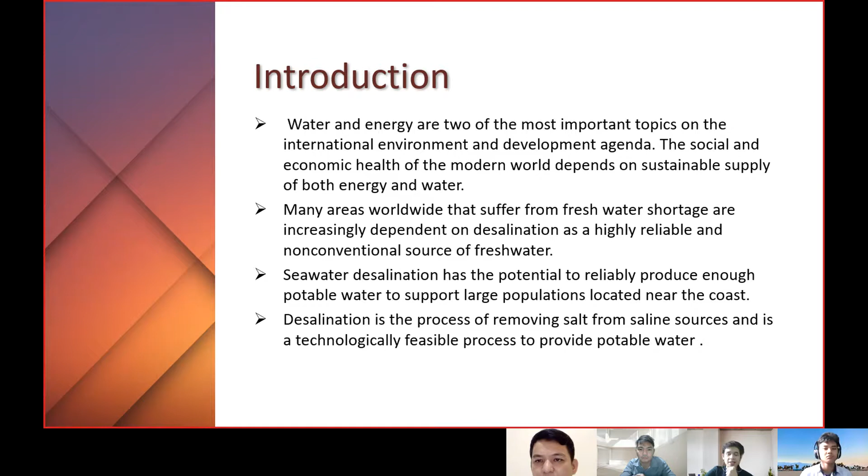Development in desalination technologies are specifically aimed at reducing energy consumption and cost. However, most of the current desalination technologies consume large amounts of energy. For this purpose, a new water desalination system has been developed through the integration of dehumidification.

All technologies are good for the desalination of salt water. However, these are often not suitable for remote areas or domestic use due to the large infrastructure associated with them. Therefore, small capacity desalination units are an effective solution for the provision of fresh water in remote areas and home use.

In comparison with other desalination methods, the humidification method has a number of advantages such as simple design, flexibility, low maintenance, capital cost, utilization of low-grade energy, and applicability in decentralized areas for supplying freshwater.

As mechanical engineers, the proposed process is to design water desalination using the humidification dehumidification process to find its full potential and significance towards small communities, given the limited number of instructional materials for development. This study impacts as an additional learning platform for students in mechanical engineering.

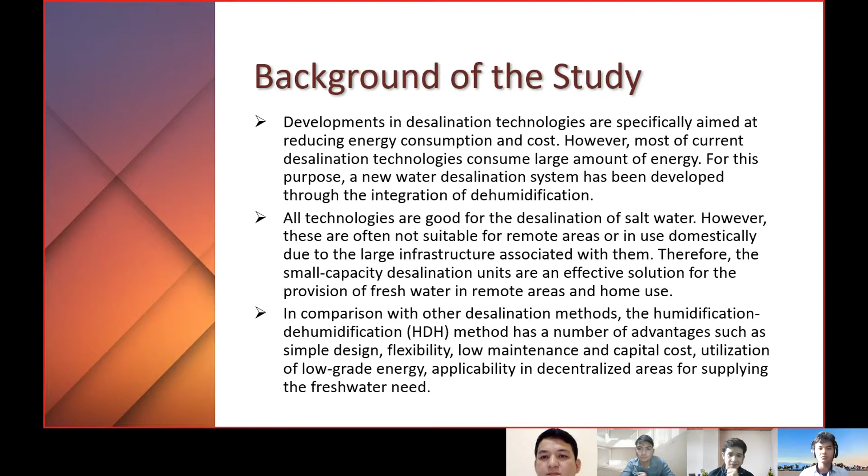The main objective of the study is to design and fabricate a water desalination system using the humidification dehumidification process. It is our main objective.

Specifically, the proponents aim to prove that it can produce fresh water with less energy consumption, to determine the latent heat recovered during vapor condensation, to determine the amount of fresh water produced in different feedwater temperature conditions, to be used as material for instructional purposes of ME students, and to select equipment or parts suitable for humidifying, dehumidifying, and heating of seawater.

Scope and delimitations: the scope of the study is on design and installation of a seawater desalination system using the humidification dehumidification process. This design is suitable for remote as well as small population regions.

It will be more focused on the process inside the system and the effect of different temperatures of seawater when it comes to freshwater output. Furthermore, the collection of feedwater for prototype testing will come from Baseco Beach.

This research, however, is subject to several limitations. The desalination system is only designed to treat seawater for household and agricultural use. Brine concentrate disposal and processing is not part of the study.

The process of solar water heating is also not part of the study. Fresh water produced is not recommended for intake unless output water testing is conducted. The feedwater temperature from the solar collector will range only from 80 to 90 degrees Celsius.

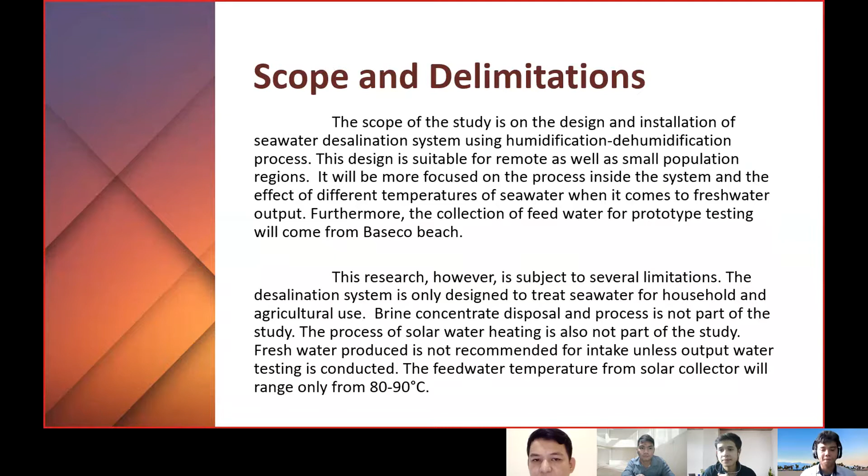Next is Van Joseph. Yes, for our Chapter 2, review of related literature and studies, I am going to discuss it based on our research.

So here is the information we gathered in our related foreign literature. As mentioned in the introduction, the most important need in our community is water. There is a clear need to help create a sustainable solution to the rural water problem in order to solve the global water crisis.

The minimum water needs for drinking and cooking for each of those communities is between 10 and 100 cubic meters of pure water per day, at a consumption rate of 10 liters per person per day. And in our topic proposal, the desalination process, here is the principle.

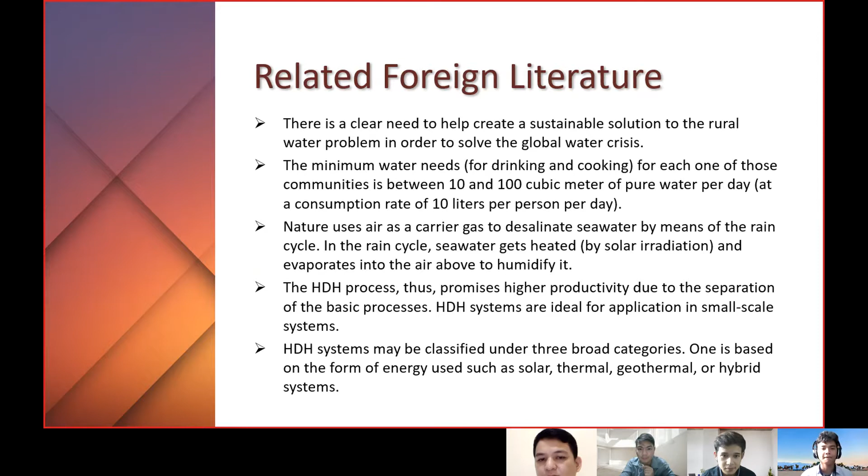Another information gathered for related foreign study - here are the advantages of HDH. Humidification and dehumidification can be advantageous in decentralized applications, meaning in places that cannot be reached by Maynilad or any other big water production facility.

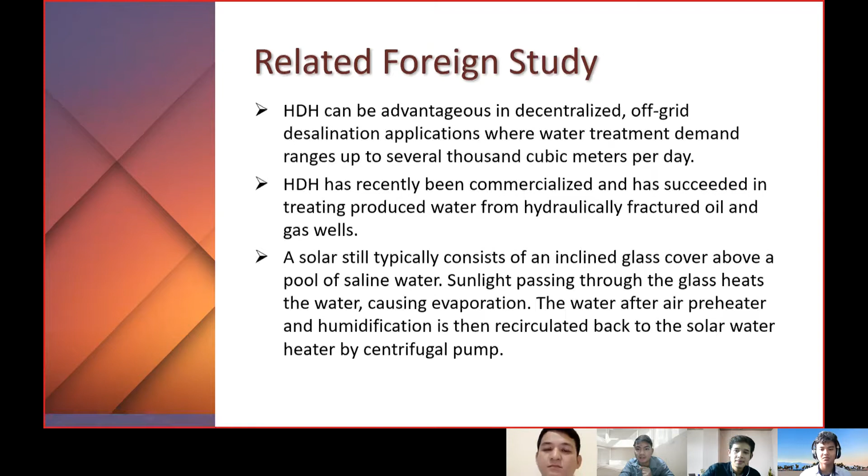Off-grid desalination applications where water treatment demand ranges up to several thousand cubic meters per day. HDH has recently been commercialized and has succeeded in treating produced water from hydraulically fractured oil and gas wells.

Before being known as HDH, it was also known as a solar still. A solar still typically consists of an inclined glass covering above a pool of saline water. Sunlight passing through the glass heats the water, causing evaporation. The water, after air preheating and humidification, is then recirculated back to the solar water heater by a centrifugal pump.

So this is the process of our HDH system when it comes to the solar still.

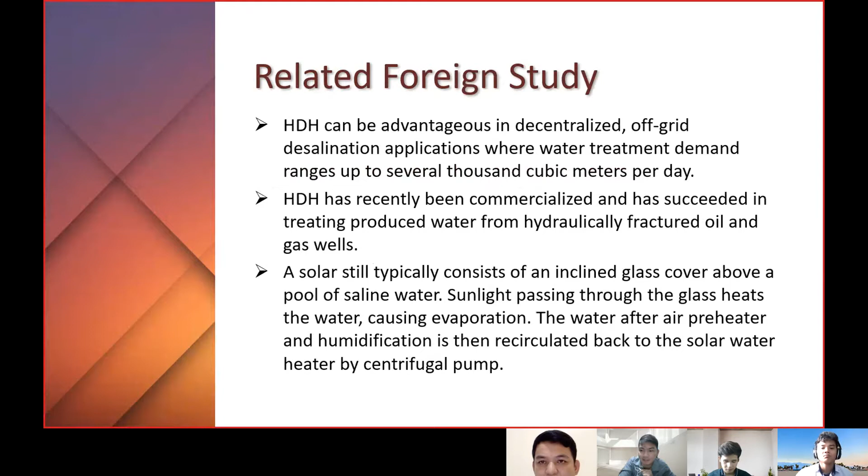This is the research information gathered based on our related local literature. Water scarcity is growing around the world, including the Philippines, and existing water resources are already under stress, especially during summertime, and this is getting worse. Locally, the onset of the El Nino phenomenon is going to make water even scarcer in Metro Manila.

One solution is the desalination process that removes salt and other dissolved contaminants in saline water. Solar power can also help solve the energy factor in desalination.

In fact, in Cebu City, the government signed a joint venture agreement to put up a 750 million peso water desalination plant that is projected to supply 22,000 cubic meters a day, although the plant can supply as much as 50,000 cubic meters a day.

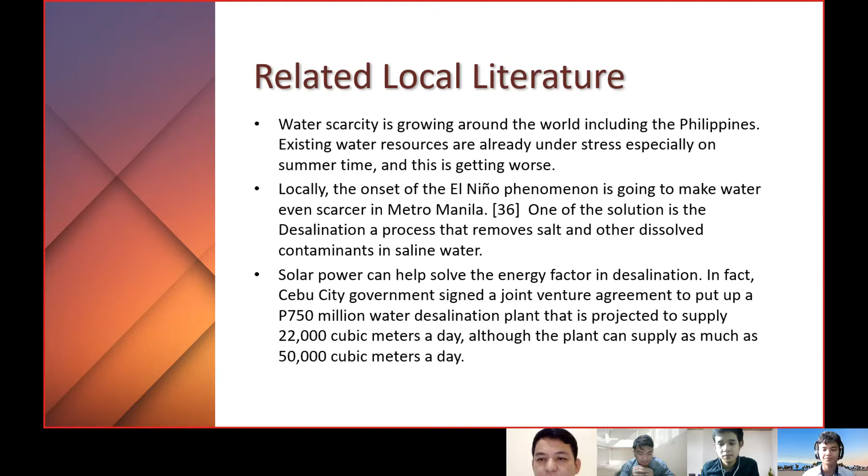Chapter 3, research methodology. We have Jason Dibilia.

This is our Gantt chart, and we are starting with choosing our subject for this project study. In our plan, we estimated just 2 weeks, but in actual it took 4 weeks because we needed to study and make sure we were all familiarized with the subject.

The next week we gathered all the information for our chosen subject. We planned it for 2 weeks, but due to the extension of our previous plan, we moved to the following 2 weeks. On the second week of our Gantt chart, we looked for an advisor for our design, and we were lucky that one of our professors accepted our proposal and gave his full support and helpful advice for this project.

The following week, which is the 7th and 8th week, we started doing our Chapter 1: the introduction, searching and analyzing the background of studies for the chosen subject, and then our objectives, both general and specific. After 2 weeks of compilation, we also did Chapter 2 and shared it with our advisor, who shared his knowledge and laid down comments on the topics of the study.

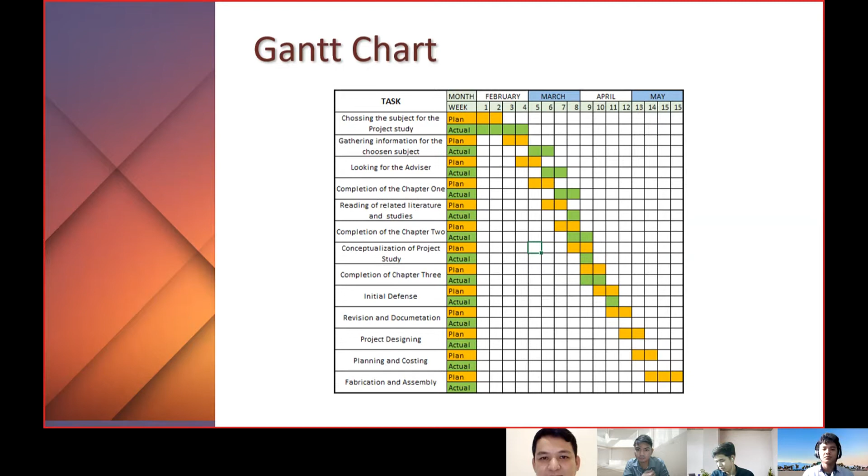This is our research paradigm, which we categorized into three sections: input, process, and output.

In the input, we start with the knowledge requirements. We came up with seawater desalination, water treatment, which requires checking the output of this project or design, and fluid mechanics and machine design.

The second is hardware material requirements, which involves fabrication of the machine, selection of materials, selection of parts, and the computation of our design. Next is the software requirements, which is Microsoft Office and SolidWorks.

In Microsoft Office, we do all the paperwork and research, and in SolidWorks we do the design.

Which is in a people requirement, which is us, the researchers, and the advisor. In the process, we start by identifying the problem, which means we need to know what and where we use the machine and how it works. And then we gather all the data that we need for the design, for the project.

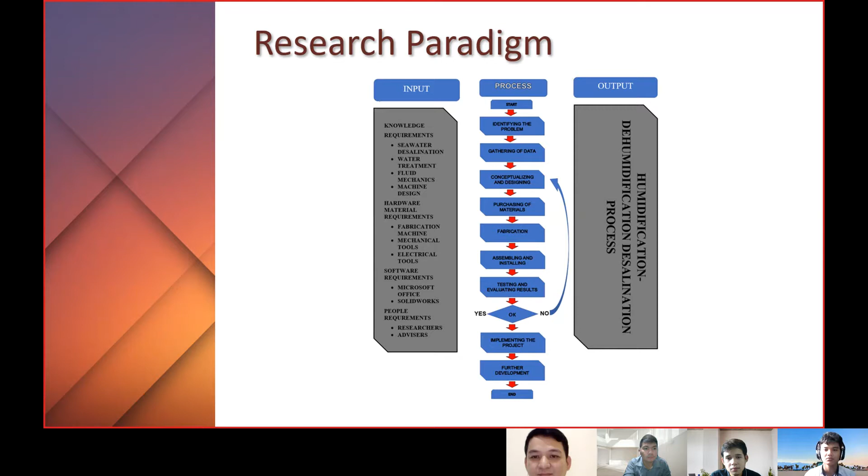Next is identifying the problem. Included in the conceptual framework, in this stage, the researchers found ways to treat saltwater using a humidification-dehumidification desalination system. Along with this, the researchers encountered problems like seawater in copper tubes, which is usually used in a condenser, but has shown drawbacks of pipe erosion, high cost of copper material, etc.

In this case, the components to be used for our HDH system, for instructional purposes for students, are: dehumidifier, solar collector or solar water heater for heating the seawater, plexiglass, aluminum tubular, and full cone nozzle sprayer, where drop size is important for considering the overall entrainment of fluid within the gas flow.

In this part of the study, it is important to identify the problem. One problem is the use of the component. We have the condenser, and in the condenser we use copper tubes. So we researched for a metal to use that will not corrode or rust. We found out that copper nickel alloy is essential to use in the condenser.

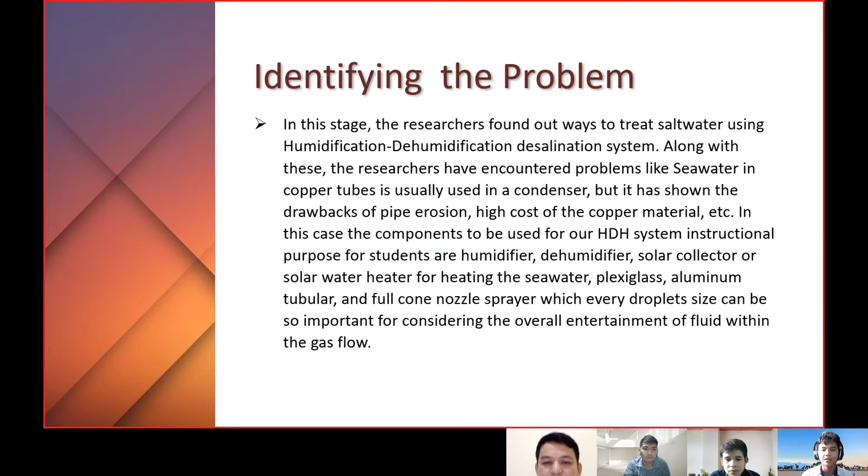The researchers adapted the idea of several studies about heat energy recovery in the dehumidifier or condenser, to determine the heat recovery using the seawater as cooling fluid in the condenser, for conceptualizing the design and selection of materials for this specific prototype. In this study, we have searched for a way to recover heat from the condenser.

So in order to recover heat in the condenser, we use seawater as the cooling fluid. We use it to cool the steam coming from the humidifier, to condense the steam and produce fresh water.

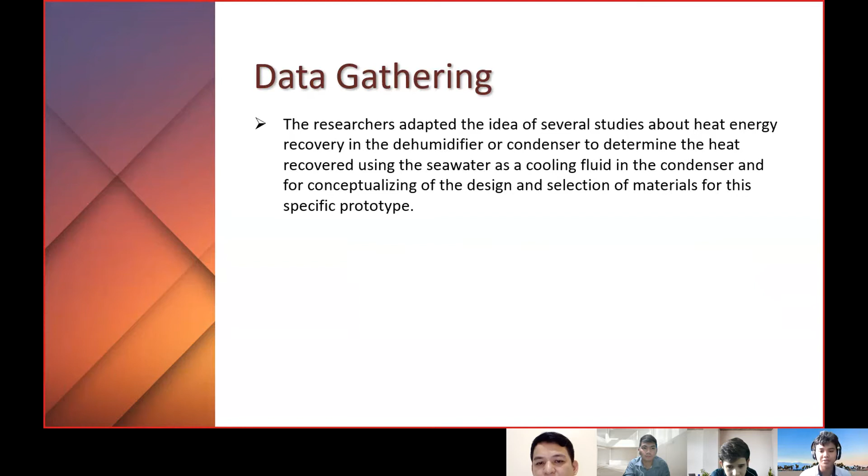Next is conceptualization and design. We have here the actual design of our prototype. We have the solar collector to heat the seawater. Then the humidifier section, we have the packed bed, which is this blue material, and then we have the dehumidifier section. We have the condenser and the demister to filter some evaporated salt water, and then we have the blower to increase the velocity of air.

Then we have two containers here. At the bottom, we have the freshwater produced container, and then the saltwater that didn't evaporate in the humidifier, which we call brine.

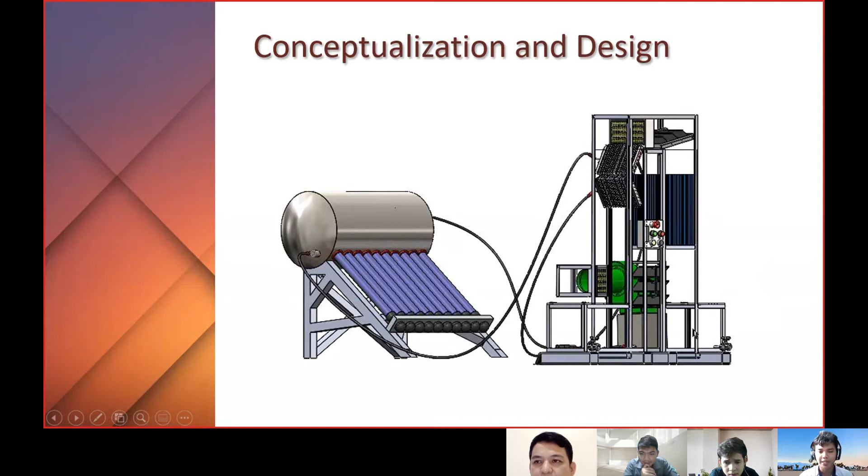Next is the component connection. This diagram will show you the process and the flow of our machine. The process will start with pumping seawater to the dehumidifier, then preheating the seawater before it goes to a solar heater.

Then fill the solar tank collector and heat up the water up to 85 degrees Celsius. Using a solenoid valve, the water will not continuously flow when the temperature is not reached.

Due to the location of our solar heater being internal in the machine, we put a pump to meet the pressure requirement that we need for the water nozzle system. And then when the temperature reaches the requirement, the solenoid valve opens.

The high temperature seawater is injected into the humidifier. We use a spray nozzle to distribute the liquid into the humidifier section. And then we estimated that 5% of the water will evaporate and 95% brine will go back into the tank and start the process again. Using a blower, the water vapor mixture is pushed into the condenser.

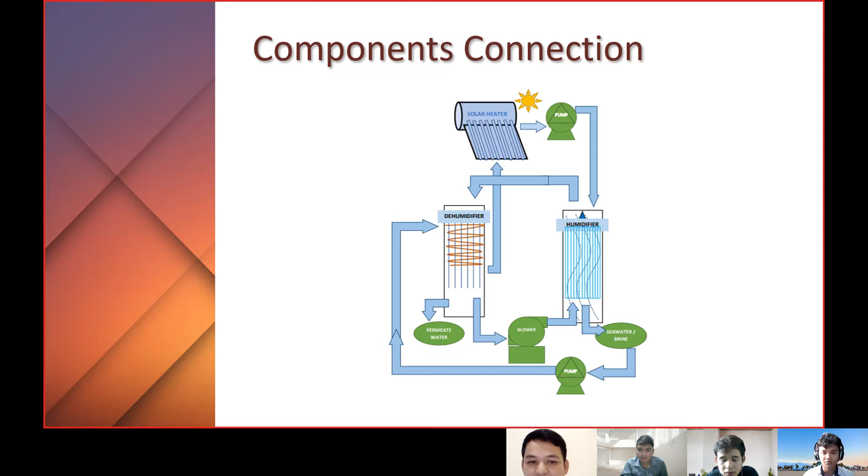Next slide. Next is the design calculation for the HDH system. This is the theoretical calculation for our design. We have to show possible humidification paths and exit states of the air. We have all these values from our calculation. First, we have to know the recovery ratio, which is 5% recovery ratio of fresh water produced.

Then the permeate concentration, based on our research in Baseco Beach, the salt concentration or permeate concentration is calculated as negative 0.2375, which is also equal to zero for the permeate concentration in desalination.

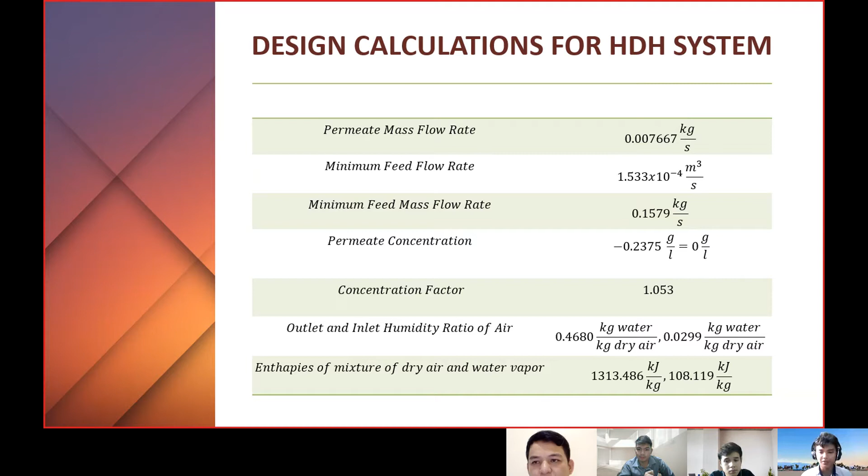Next is the component calculation of our design. We have the solar water heater. The heat added in the solar water heater is 32.07 kilowatts, and the gain output ratio is 0.8485. This is the ratio of latent heat needed to evaporate fresh water from the humidifier section.

Next is the effectiveness of the HDH system. We come up with an effectiveness of 85.72%. Next is the modified heat capacity ratio, the ratio of the enthalpy of the seawater divided by the difference enthalpy of the air.

Next is the solar water heater efficiency. We have 85.58% based on our calculation.

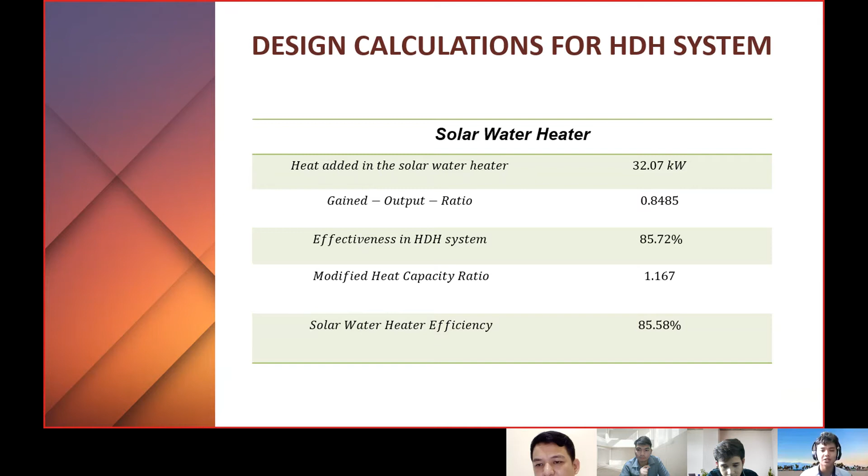Next is the calculation for the blower. We come up with power required, which is 13.30 watts, and the blower efficiency of 79.58%.

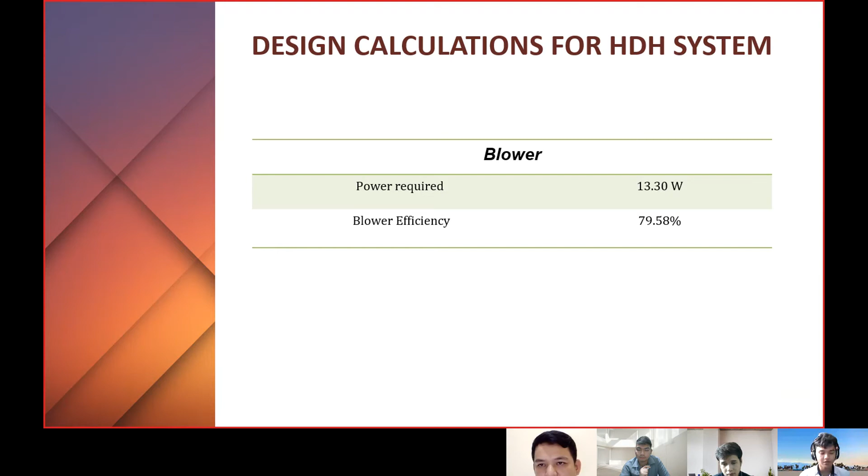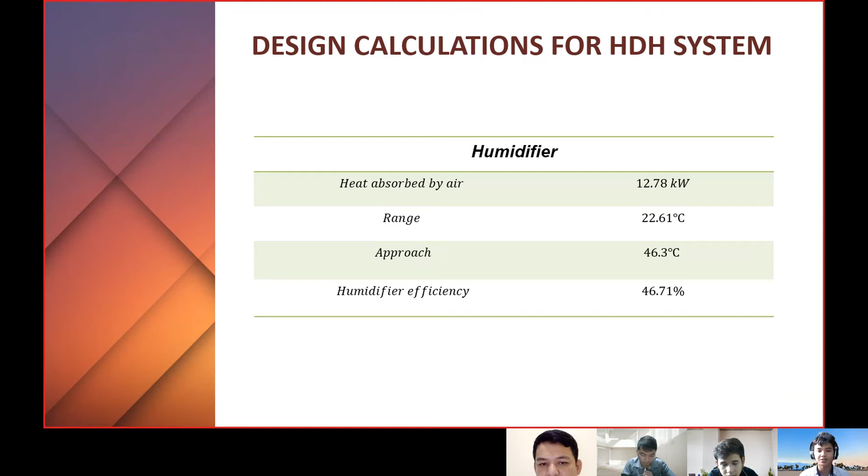Next component is the humidifier. We have heat absorbed by air, which is 12.78 kilowatts. We came up with this calculation based on a cooling tower as the basis of our calculation. We have the range, which is 22.61 degrees Celsius, approach 46.3 degrees Celsius, and the efficiency of the humidifier, which is 46.71%.

Next is the dehumidifier. We have heat rejected in the condenser, which is 15.996 kilowatts, and the heat recovered, which is included in our objective as the latent heat recovered, which is 5.65 kilowatts, and the outlet temperature of seawater, which is included in our calculation, is 39.99 degrees Celsius.

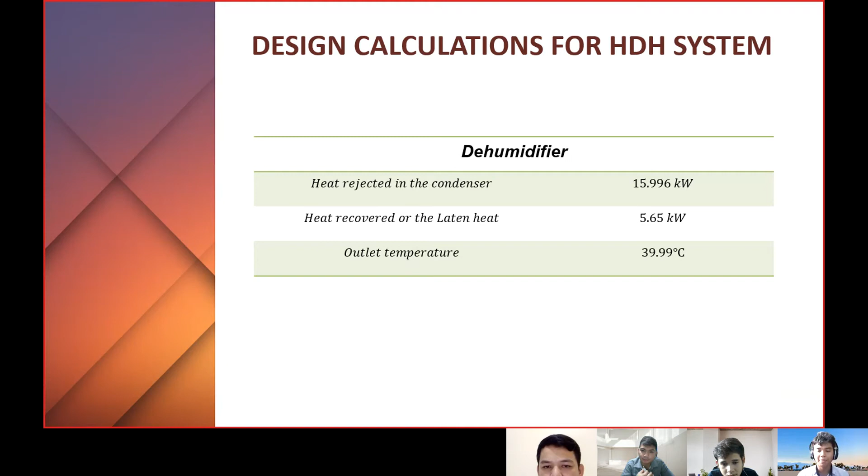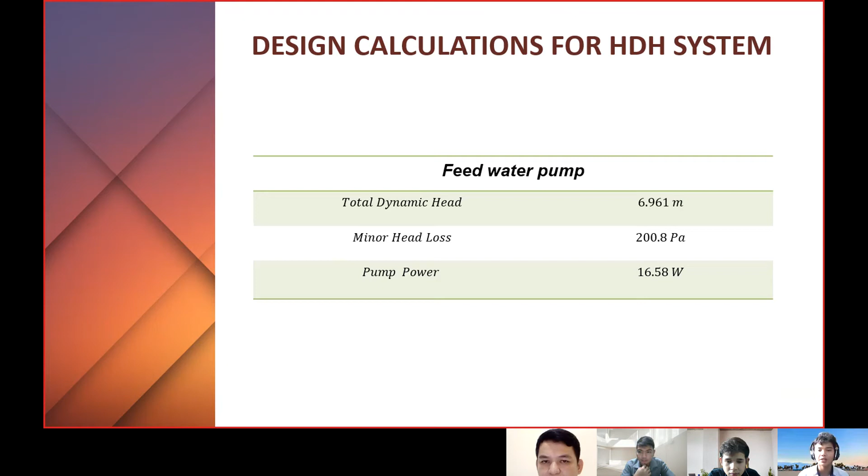Next component is the feed water pump. We have calculated the total dynamic head based on the components needed, which is the hose and other parts. We have 6.961 meters, and the minor head loss, which is divided by the density of seawater and gravity, gives us the minor head loss. The pump power is 16.58 watts, the needed pump power.

Next is the nozzle sprayer. We have the flow rate entering this nozzle, which is 2.43 gallons per minute, and the calculated drop size of seawater is 0.0001009 centimeters. Then the viscosity of seawater given in our research is 4.12 times 10 to the negative 5 cubic centimeter per second. The actual calculated diameter of the nozzle is 5.698 millimeters.

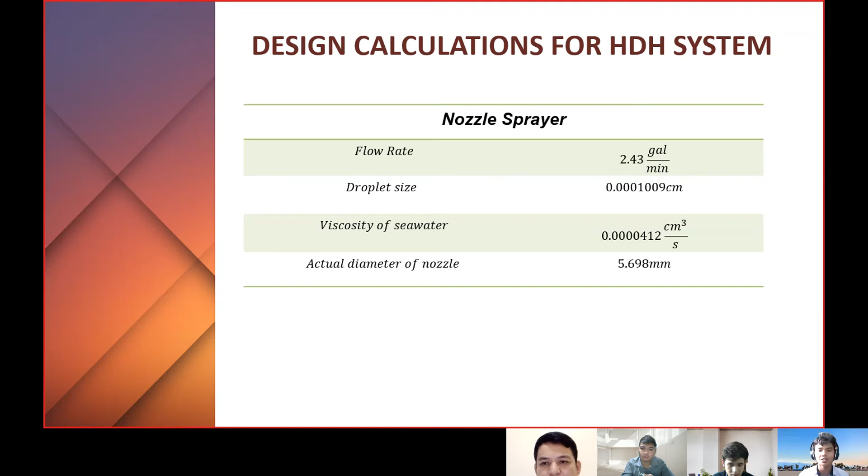Next is the estimated bill of materials.

Estimated bill of materials. Quantity 1 set evacuated tube solar collector, at a cost of 7,774.12 pesos.

Condenser, 2,500. Honeycomb, 350 pesos. Spray nozzle, 653. Seawater, 915. Centrifugal air blower, 2,480 pesos. Louver, 3,077, two pieces equivalent to total cost of 6,154.

Temperature monitor, 200. Solar hot water pump, 600. Two sets of solar collector hose at a cost of 2,500 each, equivalent to 5,000.

2 pieces of demister, total cost of 3,688. 4 pieces of aluminum angle bar, total cost of 1,600. Plexiglass, 12 pieces, 15,408. 1 piece of solenoid valve, 2,050.

Push button switch, 2 sets, cost of 300. 12 pieces of fittings, male and female, equivalent to 5,640 pesos. 2 pieces of ball valve, equivalent to 3,423 pesos. 1 piece of circuit breaker, 245. 1 piece of power supply, 425 pesos.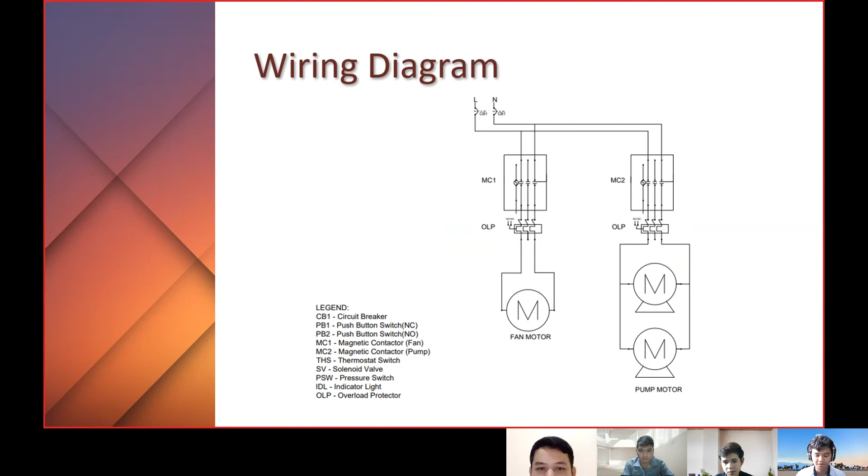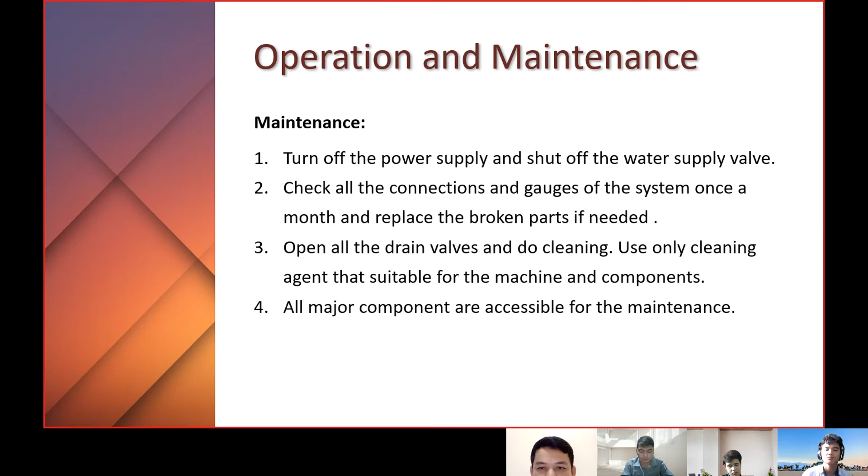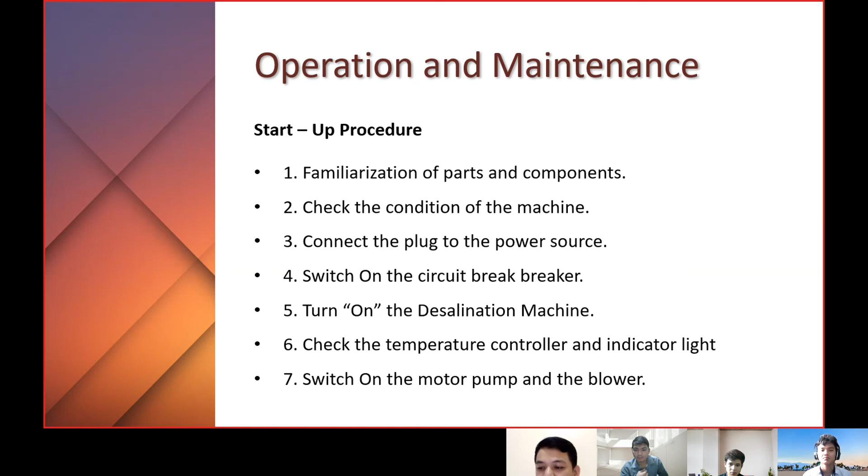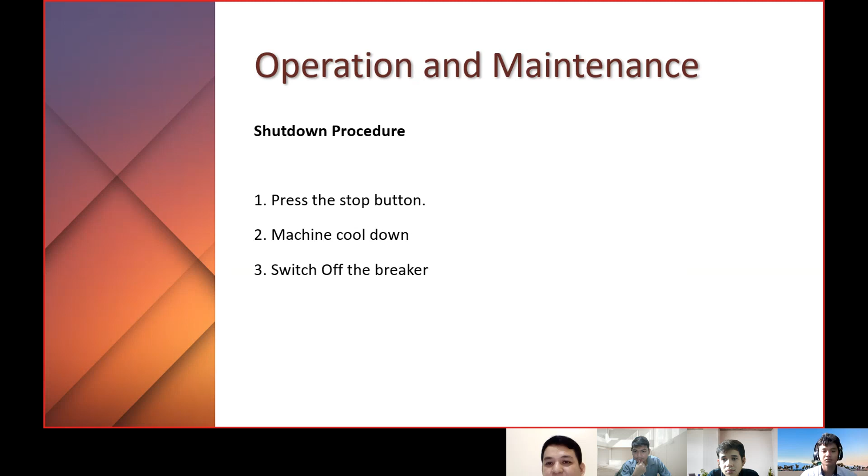We suggest that when they press the stop button, we need to wait at least 15 to 20 minutes for the machine to cool down. This is important for the safety of the equipment and the end user. Then switch off the breaker. Next, and done.